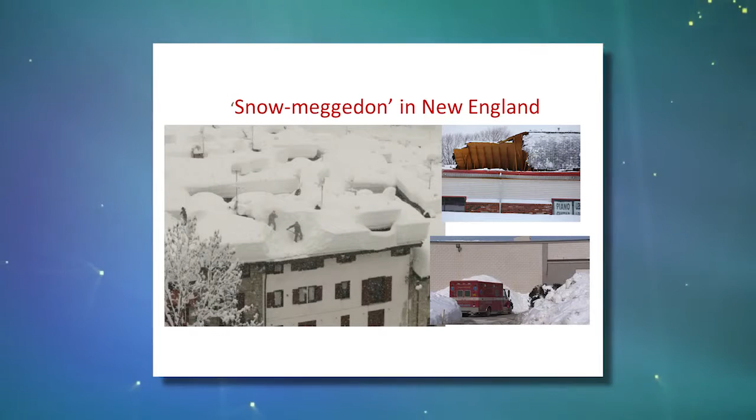So as many of you have heard from CNN, or maybe your friends or family that live in New England, we had Snowmageddon in Massachusetts. I had 110 inches of snow that fell on my roofs. And it was so disruptive for the economy. We had 120 buildings collapse because of the weight of snow, and we had frantic property owners sending people up on roofs to clear snow away from heating units, exhaust fans, and just trying to remove the weight of the snow. Unfortunately, as a result of that, 6 people fell through skylights in February alone.

So it occurred to me, on my roof, I have skylights. What would happen if a firefighter looking to rescue my family were to fall through and get injured or killed because he didn't know where my skylights were? So despite the almost daily snow, I made a concerted effort to remove the snow and make the skylights more conspicuous. But then I started to ask, why am I doing this? And I started to do a little research.

I discovered that every year, 50 people fall through skylights in workplaces all over the country, and 36 people are killed every year. But the amazing fact is, skylights in the US are not required to support a person. Now, there are skylights, Velux, Wasco, that do make skylights that will support a person. But in Europe, this is required. So the bigger why question is, why we as owners, designers, and contractors, when we replace or specify skylights, why don't we care enough to replace them with skylights that will keep people from falling through them? And that was my aha moment, which brings me to the topic today.

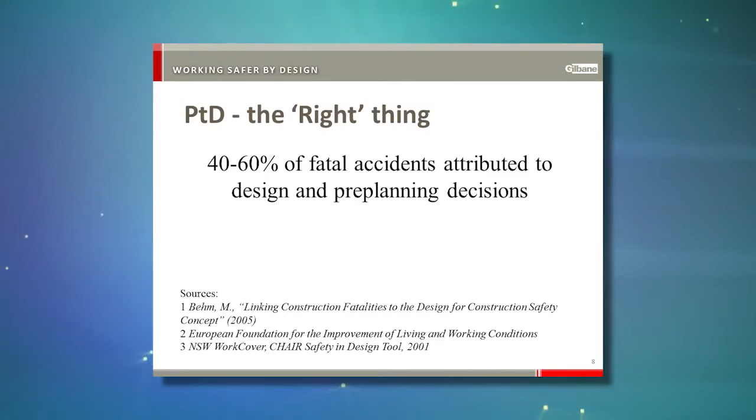Prevention through design is a moral imperative. And here's why I say that: every year, 4,400 people die in workplaces. Studies in the US and Europe on an increasing basis are determining that 40 to 60% of those deaths were the result of decisions made in the pre-planning and design process. That's 1,700 to 2,700 workers no longer on this planet because of what we're going to talk about today.

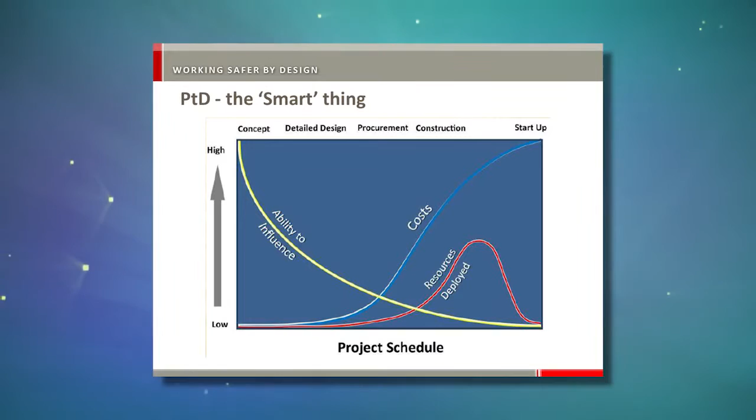And what I propose is that prevention through design is also the smart thing. How many safety professionals are in the room? I'm going to hazard a guess that you, like me, operate in the space toward the right of this graph. You have incidents, injuries, near misses, so we mobilize resources and devote our time and attention to right the ship, and we get only small increments of improvement.

What I contend is what we'll talk about today moves that to the left of this graph. We have far greater influence, and we spend much less capital if we prevent these incidents by the design of our processes. And we'll provide some examples for that.

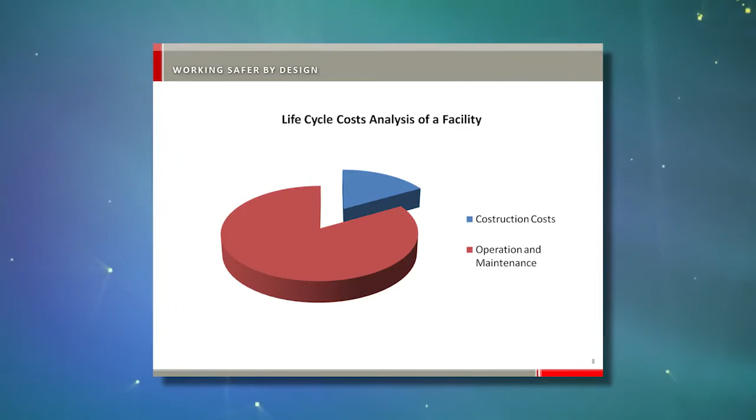Building owners and designers frequently make uninformed mistakes when they focus exclusively on the cost of a construction project and ignore the life cycle implications of the design on their operations. Life cycle cost analysis experts have studied the ratio between construction cost and the operation and maintenance cost of a building over its 50-year cycle, and determined that 80 to 90% of a building's life cycle cost occur after construction.

So is it financially smart to focus on the design elements that could result in improvements and safer environments for your user groups?

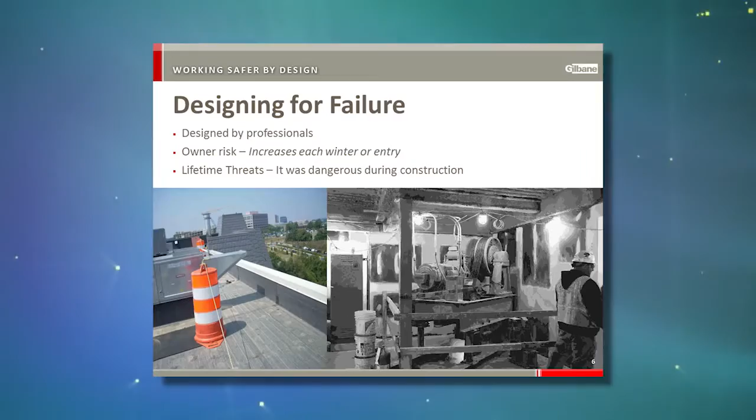Or the picture on the right: that's an elevator machine room without the walls erected. Imagine an elevator technician having to work in that, with unguarded sheaves and exposed wiring. What's the likelihood that something terrible will happen in the course of servicing the elevator? These are designed by professionals.

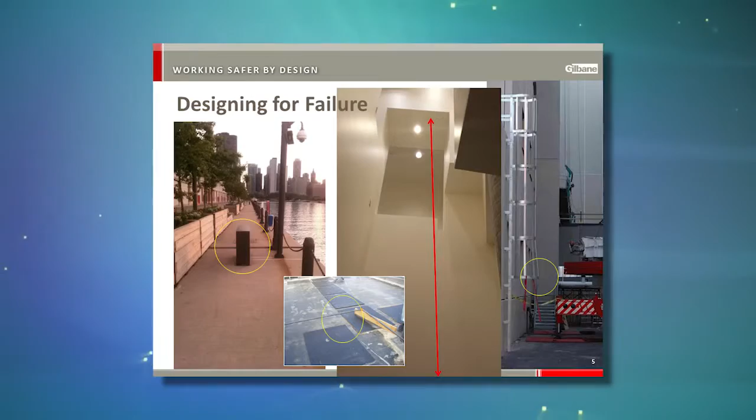The third picture is one I took at a courthouse, a state-of-the-art courthouse we built in California. There are two recessed light fixtures 40 feet above the floor. What's the likelihood those bulbs are going to get changed? And what you don't see is that the floor is a sloping floor at the bottom. Those light bulbs will never get changed in the life cycle of that building, I guarantee it.

And then, of course, the picture on the right: what's the likelihood that a firefighter isn't going to strike his head in the effort to try to get to the roof, in a building obscured by smoke? Again, these are armed hazards designed by professionals.

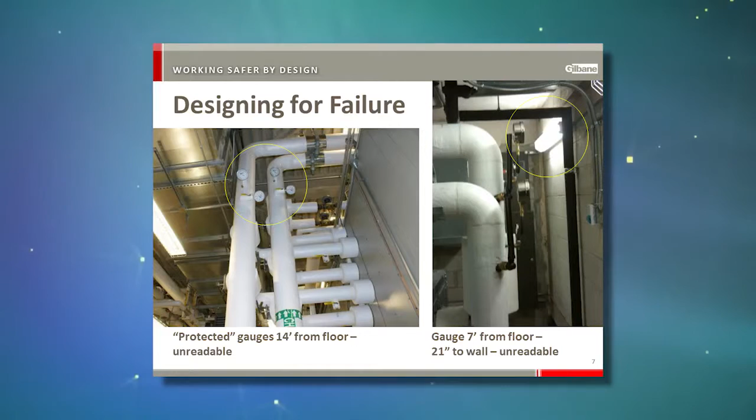Some more. How does an operation or maintenance professional maintain the safe operation of the system if they can't even read the valves, or can't even access them, or the gauges? How many have been in this situation?

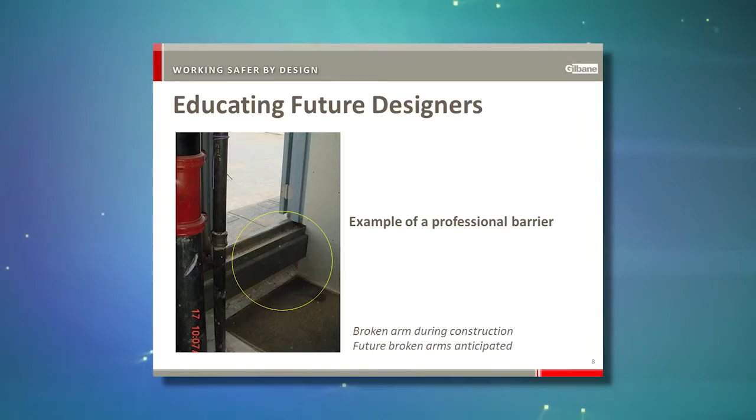The event that this picture was the source of was an accident investigation. We had one of our craft workers, after we had constructed this part of the roof, threshold, and curb, trip and fall and break their arm on this detail—which we're going to leave for the owner, because that's how it was designed. What's the likelihood, in a 50-year cycle, that there won't be more broken arms because of this detail?

So these are the armed hazards that I'm talking about. Again, be aware of these in your projects, in your facilities.

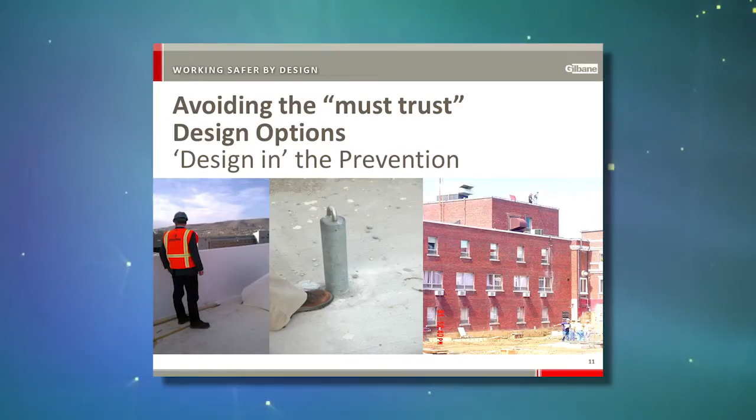Owners and designers need to ensure that the cost of a worker failing to use precautions around their design is not going to cost their life.

So prevention through design may be new for most of you. Do you know what the oldest prevention through design directive is? Anybody a student of the Bible? Deuteronomy 22:8. Moses was giving the book of the law to his people, and the Lord had given him this directive: when you build a new house, you build a parapet on the roof so that you won't suffer blood guilt onto your home should someone fall off. Yeah, look it up. So the picture on the left is a parapet, 42 inches high, right?

Prevents falls for both the construction workers and the operation and maintenance personnel. But many times you can't design in a parapet, so we do the next best thing, right? And we try to influence the designers to put in stanchions for fall protection. But human nature relies on the fact that someone's going to tie off to that. Human nature being what it is, people tend to look over the edge when they're on roofs, don't they? We got to make sure that our controls don't require someone to have to make the right judgment to tie off, because chances are they probably won't.

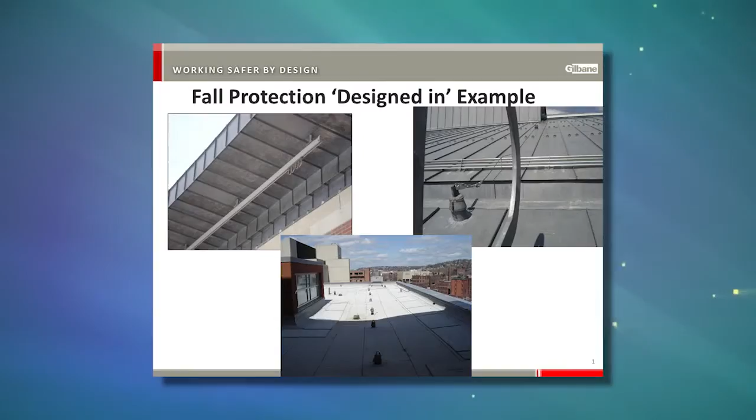So this is a courthouse that we built in Massachusetts, and we were able to influence the designer and the public agency administering this project by alerting them to some armed hazards that were going to cause problems for their end users. And we were successful in persuading them to install some of these fall protection devices. For example, these stanchions running parallel to the roof edge and around the equipment, so at least people had the ability to use personal fall arrest. And of course, we recognized that there were some mechanical units on the standing seam roof, so we were able to alert them to this hazard.

And again, a cable was installed from the roof ladder across the standing seam roof. And then, knowing that this building had a lot of windows and eventually would need maintenance in terms of caulking and things, we were able to persuade them to install a trolley system, which we were able to use during construction to support window washers and other maintenance people that might be on the exterior of the building. But the key is being able to recognize these armed hazards and then having influence, as we showed in that graph at the beginning, right, to try to mitigate those hazards.

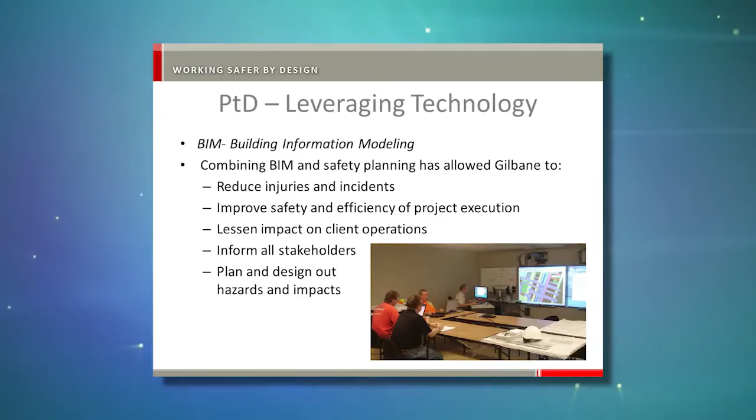So let's talk about building information modeling. BIM has evolved so much further than merely being able to look at how utilities clash. Presently now, we can use building information modeling to visualize all aspects of the construction project, from the structure to the excavation, all the equipment that supports it, concrete trucks and cranes, and determine how best to organize our project and support our workers in safe and efficient work.

Our vision for BIM is that we can leverage this technology to anticipate predictable hazards through the visualization enabled by BIM, and have a more informed dialogue with owners, general public, clients, and our subcontractors, right? To look for those impacts and those interfaces, and prescribe those corrections early on in the process while we still have the ability, before the first shovel hits the ground.

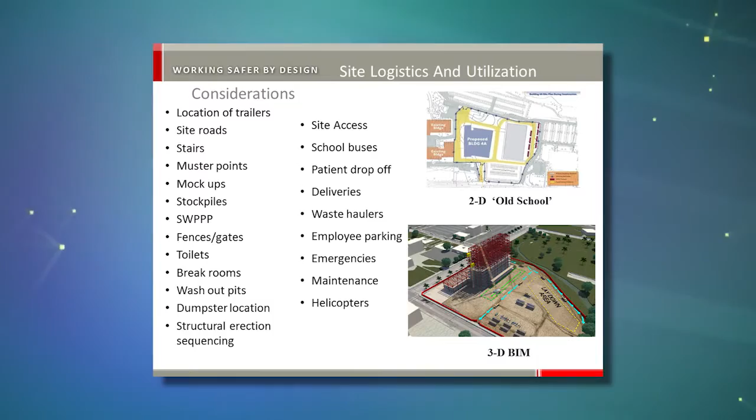So those of you that are into construction, you might recognize all of these particular site constraints that we have to worry about in construction. Historically, the only way you could try to anticipate predictable hazards was to look at a two-dimensional drawing, what I call old school. Now, through BIM visualization, you can fly through and walk through the model. You can determine how best to bring material in, where to store it, how to move people in and through the project, what particular impacts you might have on adjacent client and property owners.

Use it to secure permits, right, get safety plans approved. You can have, again, so much more effective dialogue. And all of these constraints and pinch points that you encounter on a project, you can address early on in the process through the use of BIM.

So let me give you another use of technology employing BIM.

Prefab and pre-assembly. I'll give you a case study. We did this $100 million lab facility in Massachusetts, with a $40 million mechanical, electrical, plumbing package.

It was a design assist, not a design build. There was a designer of record, and no special integrated project delivery or IPD language. So there was no contract language requiring us to come together and support each other in these design decisions. Essentially, it was like most other construction projects: here's your contractor, go build it, find the subs to do the specialty work, agree to this maximum price. That was pretty much construction manager at risk work.

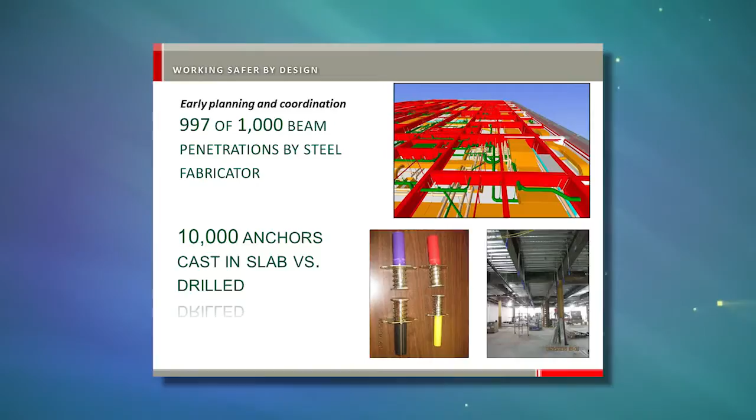We had a BIM-enabled architect, which allowed us, through our contractors, to spatially identify where all the utilities were and where they would fall in relation to the beam penetrations. We sent our BIM drawings directly to the steel fabricator, who made all the beam penetrations in the shop before they arrived on site. Just imagine the hot work saved, the fire risk avoided, the unhealthy fumes, and the logistics of doing all that work amidst other contractors.

And because we knew through BIM where the utility piping was, we also knew where the hangers were. So we were able to lay out the hangers on the concrete deck before the slab was poured. All the embeds for the hangers were already installed, avoiding ten thousand excursions up ladders, poor ergonomic postures, drilling overhead, and silica dust and health hazards, by laying that out on the slab ready for installation of the mechanical equipment.

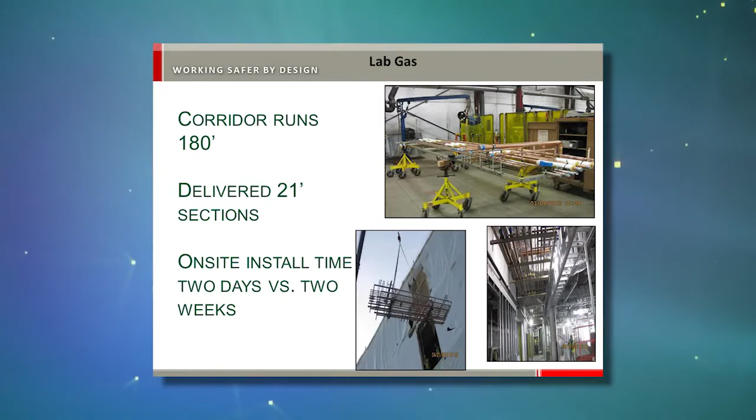We also identified opportunities to pre-assemble sections of our piping. As the slide shows, we had 180-foot corridors. We found a fabrication shop near the site, employed local labor, and brought all the trades together in a well-lit, environmentally controlled, ergonomically friendly space with tables and overhead cranes to put these racks together, layered with all the electrical, plumbing, and mechanical, and then craned them into the building.

So what would have taken two weeks took two days, and we did that repeatedly in the project. Think about the real estate we maintained—conventional construction would have had all that material sitting on the floor and then pieced together.

We need to think about construction differently. If we built my Ford pickup truck the way we build buildings, it would take three years to get it. In construction, we build the steel, pour the concrete, do fireproofing, then the mechanical, then this has to be installed and that has to be installed. It's tantamount to building a truck by saying, first we'll build the drivetrain, and when that's done, we'll work on the wiring harness.

Then when that's done, we'll do the chassis. We've got to do what the auto industry does—find ways to do these things on the same parallel path so that just in time, everything comes together. So while we're still pouring concrete, we're fabricating mechanical equipment.

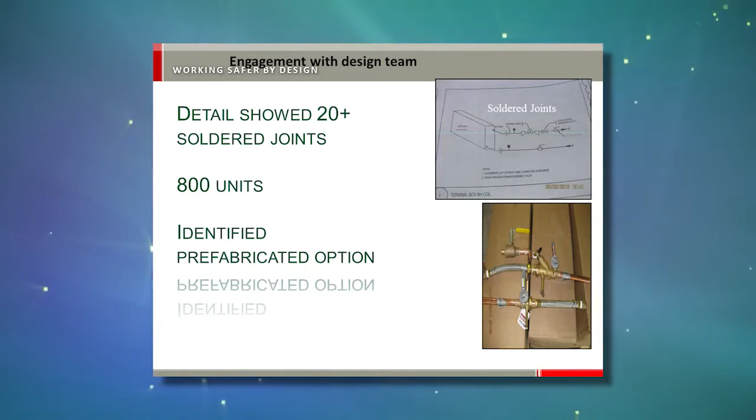Other opportunities we saw were these coil packs—dozens of welds, hundreds of them. Again, we were able to pre-assemble them off-site, saving excursions up ladders, fires from hot work, and so on.

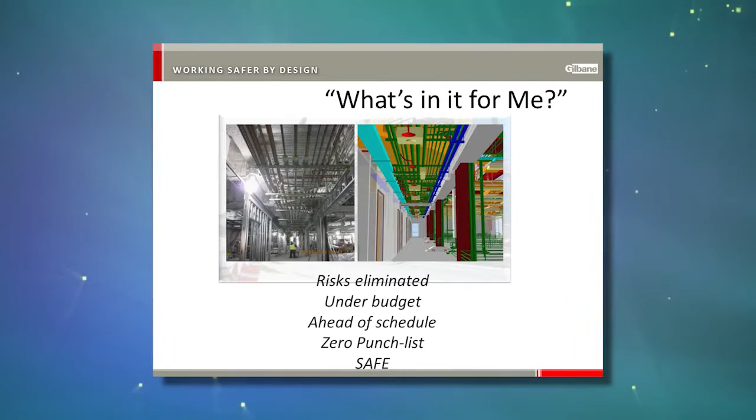So what was the result? We did this project with an incredibly compressed schedule. We worked 500,000 hours without an accident. We shaved weeks off the schedule and saved 10% on the budget. In a $100 million R&D facility, zero punch list, we had one change order for $3,000.

This works. And the project was absolutely immaculate, because all that material didn't have to show up on the project.

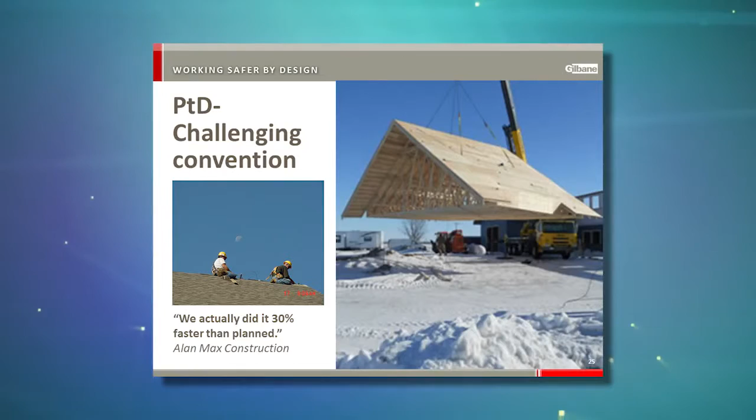Part of prevention through design is challenging convention. We had a border station to build on the US-Canadian border during a terrible winter, and we were faced, because of the schedule, with having to build this roof in some pretty severe weather.

So we got with this local contractor and said, can we build this roof on the ground? They'd never done it before, but we challenged convention, and they said, if you'll support it, we'll figure it out. And that's what we did. You can see the testimonial from the contractor: 30% faster, not to mention safer.

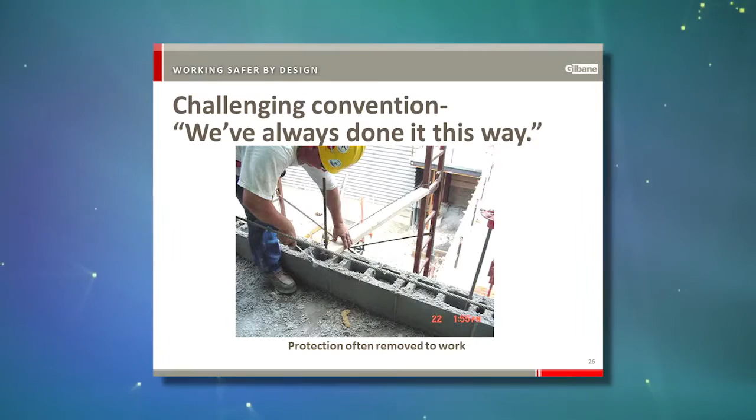So part of challenging convention is this idea of 'we've always done it this way.' Think about concrete and masonry, and the challenge we all have of protecting workers from impalement, bumps and scratches caused by vertical rebar. So what do we do? We cap all the rebar, and then the very people it's designed to protect take it off just before they're ready to form the wall or lay the block.

So we asked this worker, why are you removing the protection? It's designed to protect you. He said, we've always done it this way. We said there had to be a better way.

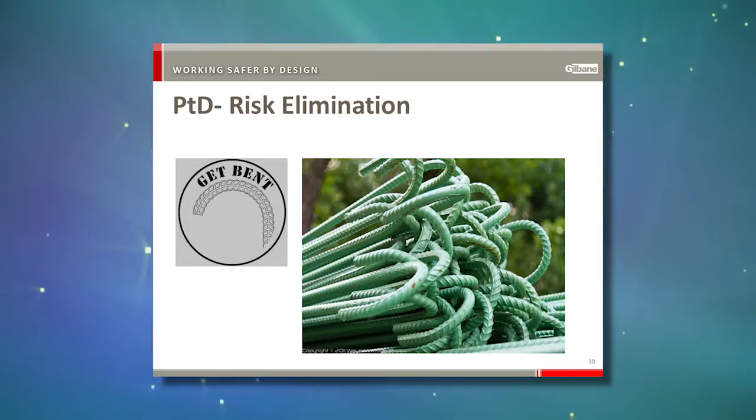Candy caning rebar - I'll talk to you about this in a moment - removing the impalement hazard in the detail shop. Isn't that unconventional?

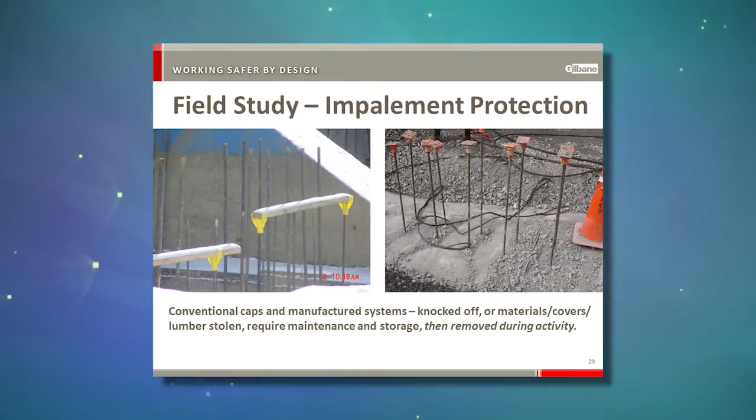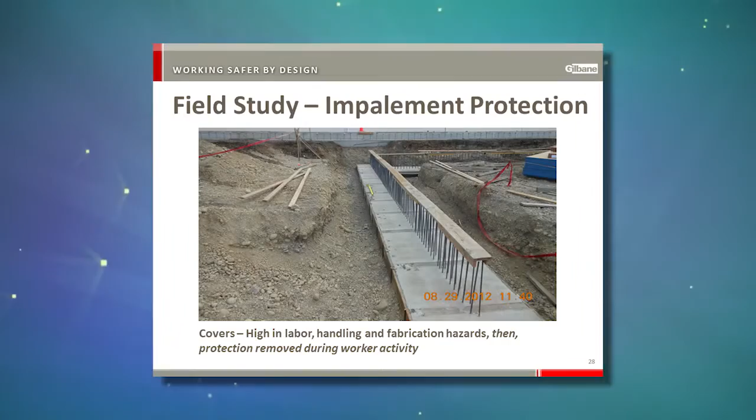First, we had to do a study to prove that it was worth the effort. So we took all the conventional rebar protection devices, the Carney caps shown on the left, the standard rebar caps, whether mushroom or metal embedded, doesn't matter. Looked at those - labor intensive, of course, always falling off. And we looked at troughs, but again, labor intensive, material intensive, wasteful, not applicable for every situation because it presumes that the rebar is at the same elevation.

So we had the opportunity to work with a strategic partner, a subcontractor, Baker Concrete. They're a national concrete company, and I know they've built some projects here in Florida as well. We were building a new engineering building at Ohio State University, and we wanted to try out this idea, this get-bent approach, candy caning rebar.

But again, we had to prove that it was worth it. And we discovered that there was virtually no cost to doing this unconventional approach. In fact, the rebar steel detailers pretty much said, it's just one more bend for us. It's in the process of being bent anyway, so it's just one more bend. It doesn't cost us anything.

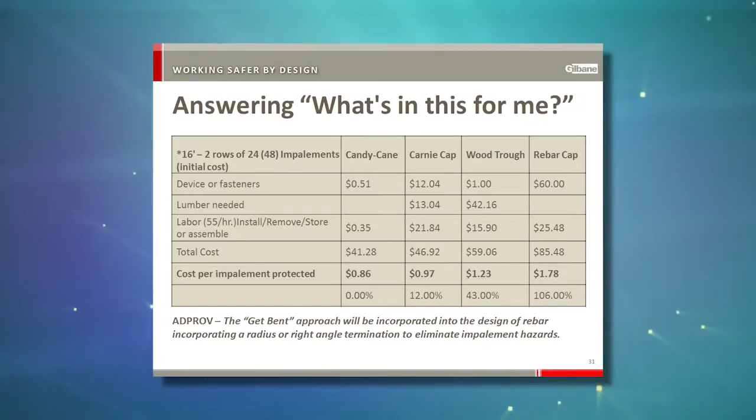Imagine how many of us chase our tail with rebar caps and rebar protection, and the time and wasted effort - solved.

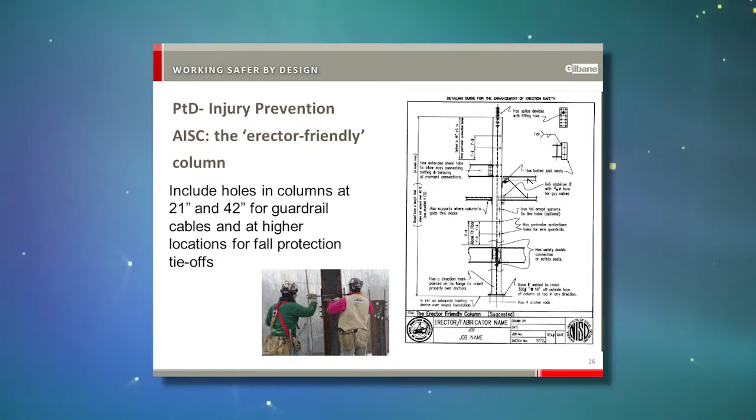Unconventional ways to design hazards out and work safer by design. Now, we don't have a monopoly on this. The American Institute of Steel Construction actually had a brilliant idea: let's go ask our stakeholders, the iron workers, who have to build to our detail.

And so they did, and the iron workers said one of the most challenging and dangerous connections we make is a column splice. Now, the AISC had designed the most efficient column splice structurally that they knew, and that was to make a column splice 2 feet from the floor above. But that required iron workers to set up extension ladders precariously on corrugated metal deck, and then take their hands off the ladder to tighten the bolts. Extremely dangerous, a cause of many iron worker accidents.

So by getting stakeholders together and working through this, the AISC proudly published a standard detail that is now used nationwide, called the erector-friendly column. It puts the column splice 4 feet above the deck, so all of that work is done with boots on the metal decking.

And in addition, it pre-punches the standard guardrail holes at 21, 42, and 7 feet if personal fall arrest systems are going to be used, saving all of that danger and risk. Again, all part of designing it into the process.

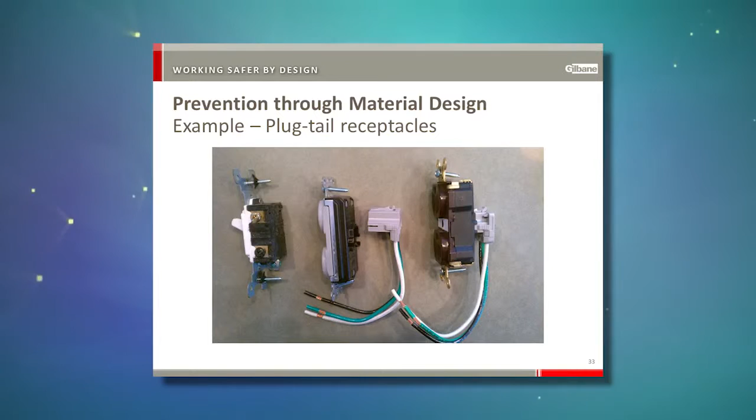So we looked at these plug tails, and they're commercially available. They use a tail that basically plugs into the back of your switch or your outlet.

Right? Pre-cut splice, right? Simple to do, right? No need to work inside the box. Make the splice outside the box, tuck it in, plug it in. Takes 2 seconds. But again, we had to prove this.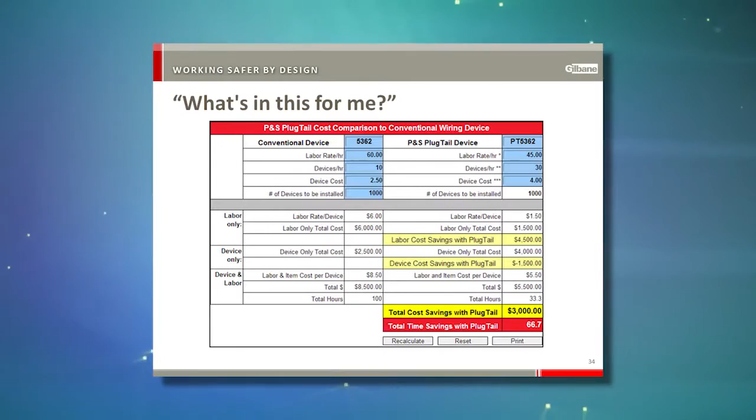So we did a study. And we looked at the expense of a plug tail versus conventionally installing receptacles. And yes, while there is an initial cost, the fact is with a plug tail, even a journeyman electrician can install these, or even an apprentice. I mean, they're fairly easy to install.

So you have a lesser pay grade, if you will, but most importantly, you can install three times more of these than you can conventional receptacles. Right? So that productivity alone saves you labor. So for 1,000 devices, even with the expense of 1,000 plug tails, you save $3,000. Right? Challenging convention.

You know, if you haven't checked it out yet, I would encourage you to go to the SawStop exhibit. It is a great product, and it is a great table saw.

So the first serious accident I ever experienced, I was a young 20-something superintendent, and a foreman burst into my trailer, holding the finger and thumb of his also 20-something apprentice who had just cut it off with a table saw. They didn't teach me that in engineering school. I didn't know what to do with that. That still haunts me. There's a better way.

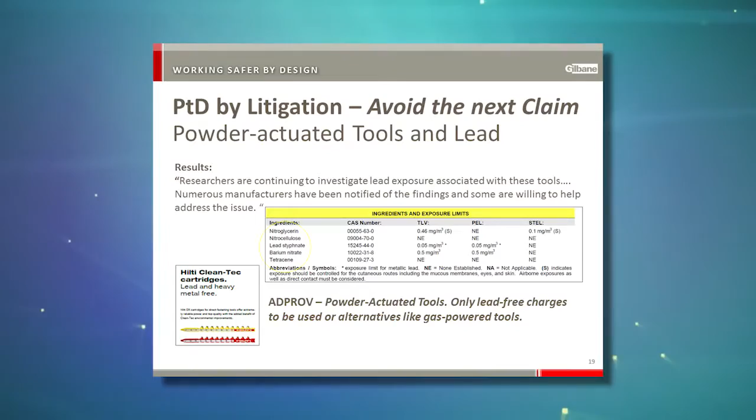Sure. This is the next sleeper injury or illness. There's a better way, though. Ramset and Hilti make lead-free boosters with no impact on performance. You know what the lead does? It doesn't increase the boost. What happens is when the lead explodes, the lead dust becomes like graphite. It lubricates the barrel. Really? There's got to be a better way, right? And these products are available, and they're not that much more expensive. And you can eliminate the lead hazards on your project tomorrow.

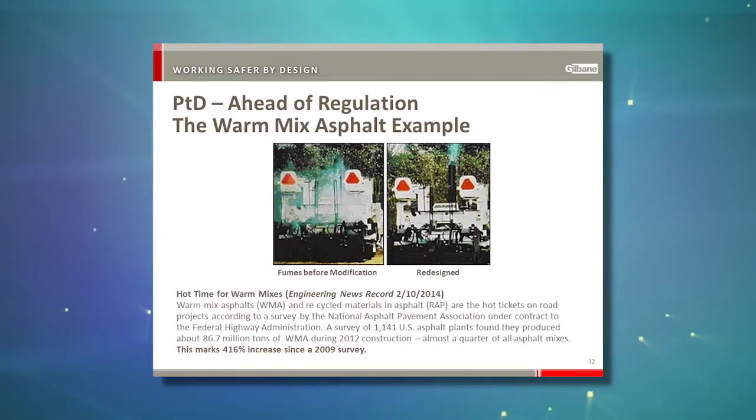So here's a great idea that was in advance of regulation. So the asphalt industry recognized the dangers of asphalt fumes and realized that OSHA was getting ready to come up with a notice of rulemaking for regulation. So the asphalt industry got together and decided that, we got to clean our own house here. So they explored different ways to lay pavement.

And lo and behold, they discovered if they didn't heat the mix up quite so hot, it wouldn't generate half as many asphalt fumes. And they wouldn't use as much energy. But they still had a product that performed exceedingly well. And even better, you could get on it quicker. Right? It didn't have so much cooling time.

Right? So they tried this warm mix asphalt experiment, and now the use of warm mix asphalt has gone nationwide. It's gone up exponentially because people have discovered there's no reason to heat asphalt to the temperatures they were heating it at and causing health hazards for the paving workers and spending all this energy. But there's a case where the industry got together, recognized the problem, and tried to find a way to work safer by design.

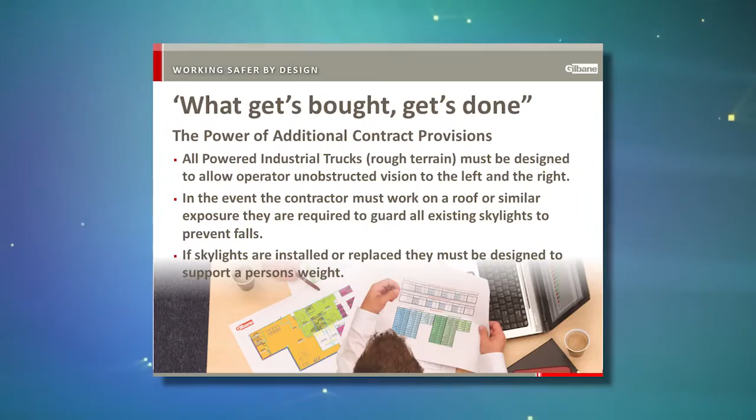So I want to talk about additional contract provisions. Sorry. So I'm a CM. I live and die by the performance of my specialty contractors, right? Our contractors, they buy specifications and plans, right? And that's what they own, and that's what they bid on. So if I want these requirements, I need to specify them, because as I say in there, what gets bought gets done.

Some of these things that you've seen have to be spec'd. If I want a SawStop, I need to require a SawStop. If I want plug tails, it needs to be in the contract. But that's how you make that happen, is in these additional provisions.

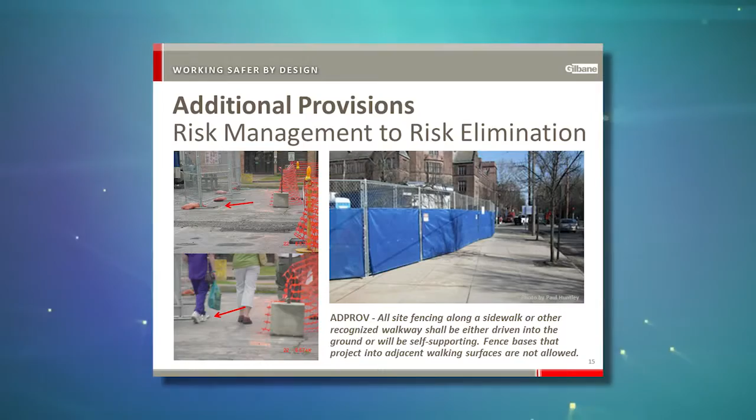For example, picture on the left, taken outside of Oakland Airport, one of the busiest airports on the West Coast. Notice the pedestrians almost coming in contact with the fence supports. So what happens at night? There's no lights. Somebody trips and falls on that. The contractor owns it, owns the injury.

So, we've got to think beyond, well, this is what the fence company has to provide. This is what convention tells us, right? Additional provisions can say something like we specified here. Fence posts shall be either driven into the ground or supports, or will be self-supporting where the supports don't lead into the passageways and accessways.

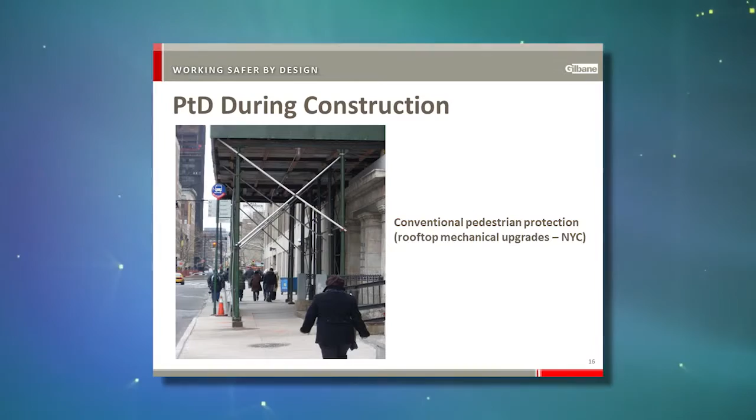Everybody ever been to Manhattan? A lot of you might have. These are everywhere, right? These scaffold covers, right? And of course, the New York Department of Buildings requires if you're doing any work on the roof, you need to build this at the pedestrian level. Do you see any hazards associated with this? I mean, it looks pretty substantial, right?

But in the winter we just had, you've got to shovel it, you've got to sand it, you've got to salt it, you've got to light it. And then most of these are on sidewalks in proximity to roads. What if a distracted driver drives into one of these things? I mean, people could get killed.

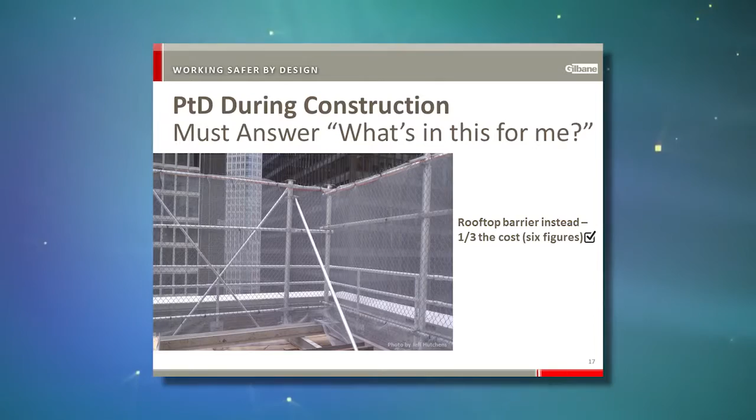What's the better approach? Well, if the hazard's up on the roof, right, put the protection on the roof. For a fraction of that cost to erect that and maintain it, you can build something like this on the roof. Keeps workers safe, keeps material inside the roof. But there's a building code that says it must look like the former picture. Right, so we need to challenge convention and then prove that it can work.

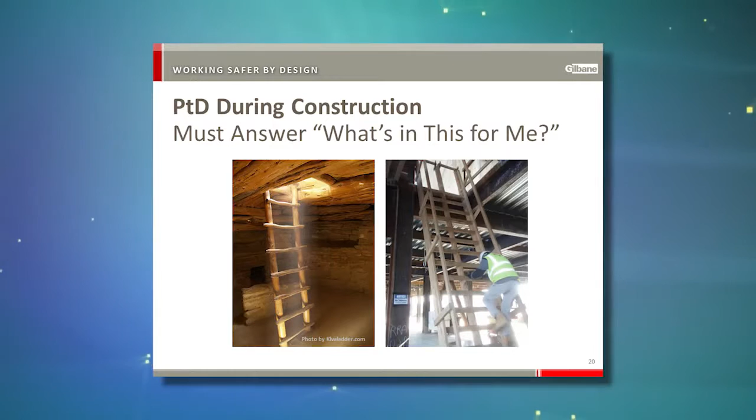And you'll see my subtext here is what's in it for me, right? Because with all of these, ultimately you need to persuade people, convince them. You've got to demonstrate what's in it for them. So the picture on the left was taken at the Natural History Museum of a ladder that was constructed 10,000 years ago. The picture on the right was taken 10 days ago. Not much different. Now, it meets the ANSI 14.1 standard, sure.

Right? So I saw this worker climbing up the job-built ladder with a tool in his hand. But you can't do that. You've got to make three-point contact. So a well-intentioned person says, well, just drop a rope. How many of you have heard that solution? Drop a rope at the ladder. Have you ever seen 200 workers try to go into the building with tools and stand at a job-built ladder while ropes are going up and down?

You can't impose solutions that aren't workable. You lose credibility, and you have no chance of it being followed. And then you set up for non-compliance. So what's the solution? Right? Take the stairs.

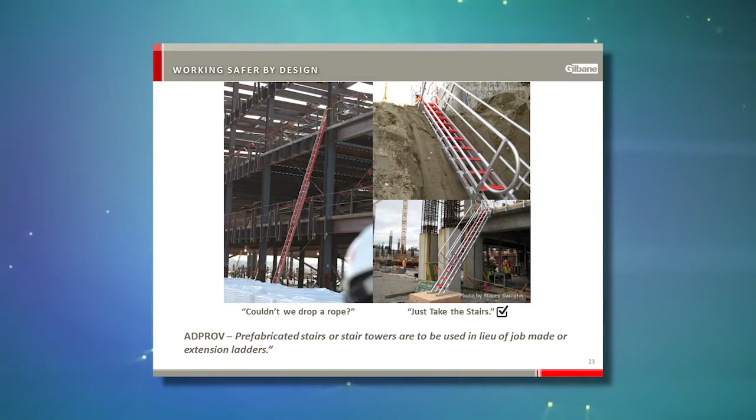So we've required in our safety program now that we will not allow job-built ladders for site access. And we're a construction manager, so that's what we own. We own sanitation, site access. We need to provide the conditions for the workers for safe and efficient work. That's all they want. And so we just specify whether they be scaffold stairs or stairs like these.

And workers appreciate that. They work more efficiently, they work more safely, right? And we don't set them up for failure by setting up ladders and then wondering why they don't make three-point contact.

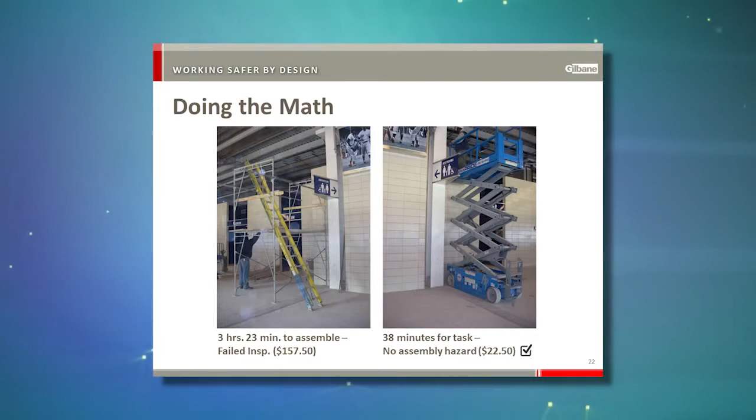Right? So when you talk about prevention through design, if you want to be heard, you've got to use the language and vocabulary of productivity, right? And safety will follow. So you look at this example. Now, notwithstanding all the time and effort and money it took to build that scaffold, there's still two or three violations that I bet you all could probably pick up. Right? The cheapest, most productive thing to do is use a lift, right? Use the language of productivity, and you'll be successful selling safety.

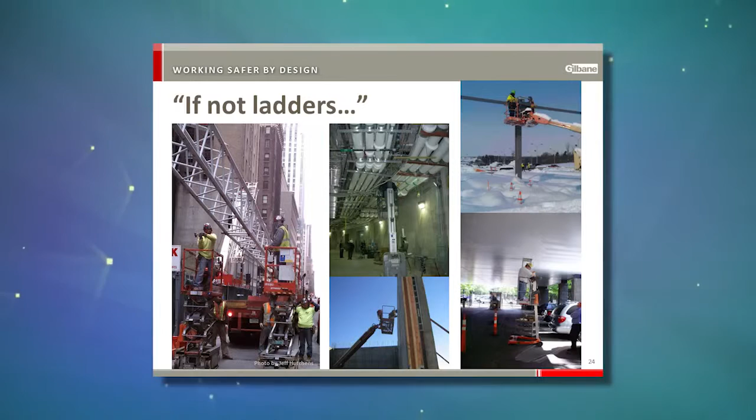And then, I've had to learn this in 30 years of construction. Right? You've got to have alternatives. You've got to have solutions. We can't just be the safety professionals that say no all the time. Now, part of that means we need to be well researched. We need to study and see what new devices and products are out there, and introduce people to those. Because most construction people want equipment that's cheaper and faster, but there are innovators out there. And so if not ladders, then what can we offer? So what are our opportunities?

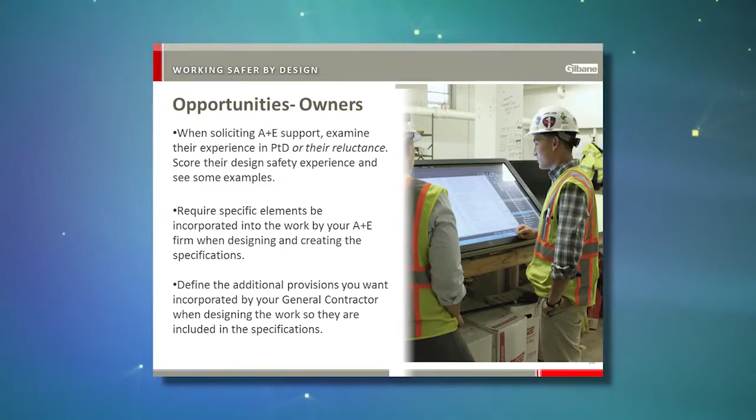If you're an owner here in the room, right, ask your designers about their experience with prevention through design and grade them on that experience. Create additional provisions in your contracts with your general contractors so these things get built into the contract. Okay? Hold your general contractors and your construction managers to these safer alternatives. Right? And look for those armed hazards that might be in your building and challenge design professionals that have provided risk for your users.

Any insurers in the room? Sure. So, right, train your people on recognizing these armed hazards. Right? Introduce these prevention through design ideas with your insureds, right? And talk to designers, because ultimately these are going to result in claims later on that you're going to be paying for. Again, back to that curve, our influence increases and the resources we spend decrease the further upstream we go.

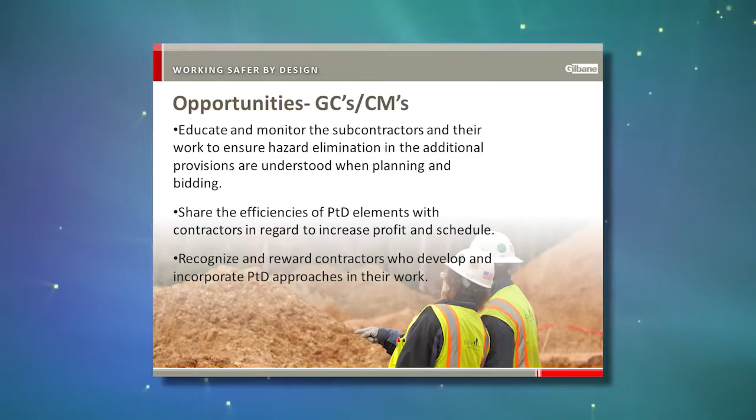And then GCs and CMs, right? Use these additional provisions, recognize those contractors that integrate prevention through design techniques, right? Prefab, pre-assembly, reward them with contracts, reward them with recognition, okay?

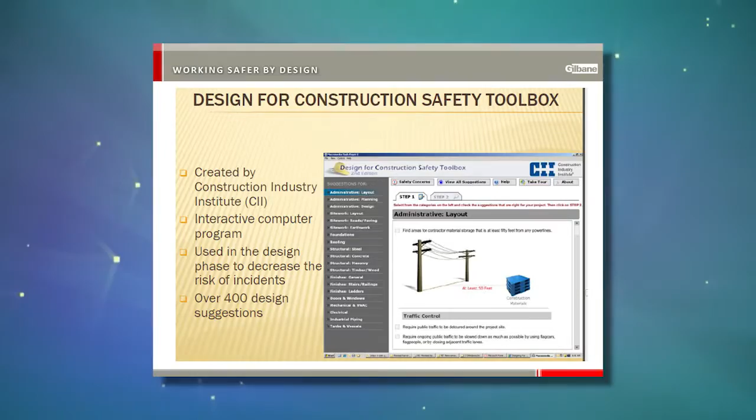The Design for Construction Safety Toolbox is an interactive program where you can put in a specific activity and it'll tell you the hazards that you're likely to encounter and how to mitigate them. And another interesting interactive program is Slide Rule. So through Slide Rule, you put in a particular activity and quantity. So let's say I'm going to install 150 linear feet of 8-inch cast iron pipe, 10 feet in the air. Slide Rule will look at the frequency of accidents, the potential severity, and the exposure. It'll come up with a risk rating. The lower the risk rating, the safer the design. Again, it's available online. It's an interactive program.

And then lastly, and I'm most excited about this one, how many people have had to build a project to LEED gold or silver? Okay, so maybe a quarter to a third of you in the room.

The U.S. Green Building Council has a LEED rating to design and construct buildings in a sustainable way, focusing on recycling, energy efficiency, et cetera. You fill out an application where you take the elements of how you constructed a project, its design elements, its energy efficient elements, and you get points for these various things. Depending on the number of points you can apply for and obtain a LEED rating. And these are jealously guarded. Our owners, our clients, brag about these, and the people that work in the facilities are proud to be in a LEED facility.